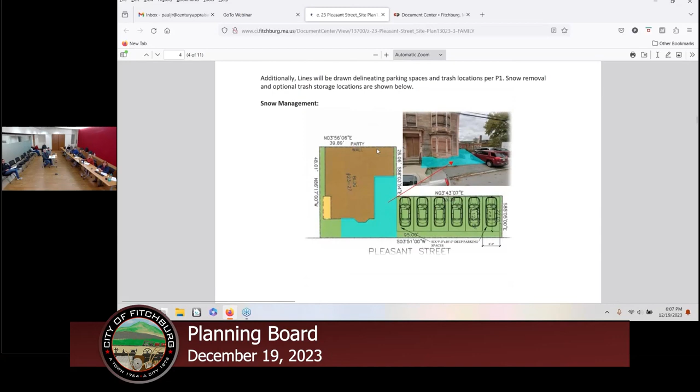Yeah, so if you start at the top, just scroll up. So basically, you can see that's the facade there, that's the front face of it. It hasn't been in use in a long time. This building, the back of it is attached to what appears to be, well, it's now an apartment building. I think it must have, back in the day, been some sort of industrial building. I think the owner kind of lived in the front part, and then it was attached to that multifamily. This is the picture that Peter sent me, the rear of the property.

Yeah, so basically the intent is to completely restore the exterior. I saw the comment from the planning board regarding the historical colors, which we're completely fine with. We're going to maintain the existing historical trim, put in new windows. Obviously, we're going to be getting a HERS rating. We plan to put in a full sprinkler system so that it's fully up to date.

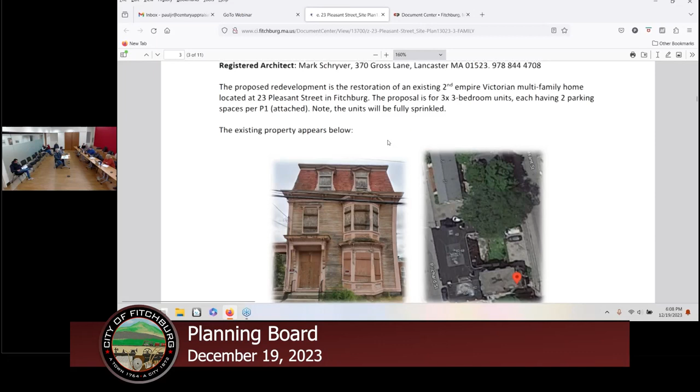And we'll try to really highlight the historical elements of the property. We'll do landscaping, as was suggested in the response to the application, and pretty much anything you guys would like to see, I'm happy to do, as far as the things outlined. There's not much area to plant, so it's kind of limited. We've got an 8x8 area where we can plant some shrubs, rather than a lawn, since that's not a good space for lawn.

The house is sitting on top of an existing parking structure, a giant concrete block, which I had my engineer come out and take a look at. He said that was acceptable. There was some work that needed to get done beneath the back stairs, not those stairs, but another stair on the side of the building that has a fieldstone foundation that needs some work, but we're planning to address that.

If you want to switch back over to the application and scroll down, I'll just talk through what I discussed. That was my initial idea. I like that kind of modern farmhouse look, but if the planning board would like to see something else, I thought it was historically like a modern twist on a historical look.

Except for the colors, yeah, we'll fix it. Colors are just, because you mentioned that the windows may not be black, so then they're white, so it's all white. Yeah, so that's fine. I've done some projects in Sudbury recently, and I like to see the black trim in the windows, but they like white. So it depends, it is what it is. I'm not really hung up on the color per se.

Going down, that's the only real area for plantings right there, so we'll do what we can. A mulched area with some low growth, hydrangeas, stuff like that.

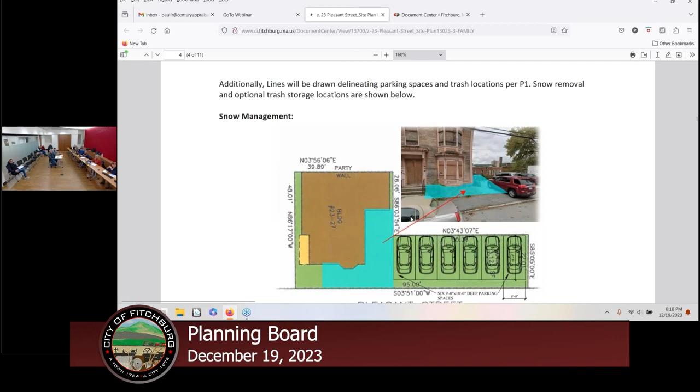In the photo there, you can see the actual parking. So it's currently utilized as parking space, and that was our intent, just basically to stripe it, designate it, number it per unit.

So you understand you're driving over the curb right now? Yeah, so you need to pull the curb cut and pull that off. I've submitted that to the DPW, and I indicated that typically it's 36 feet, so we were going to apply for a waiver for 54 feet. I think it should be 54 feet because there are 6 parking spots at 9 feet each. So that's where I got 54 feet, should be plus or minus a foot.

And then trash storage, you can see on the left there's a little deck area where we could put a few trash cans, or on the right there's also space there for trash management.

We can talk about that, because I see that by the plans you're no longer going to utilize the small porch at all for any type of entranceway? There isn't any entranceway there right now, it's just kind of hanging out the side.

So I could put up a little 42-inch railing there, there's enough room. It just doesn't look like it's got enough room. Do you know how big the totes are? They're not going to be able to pull one tote around another tote to pull stuff out over there. And you're going to need 6, 3 rubbish plus 3 recycling. I think there's enough distance between the parking and the other side, so if you have enough on the other side.

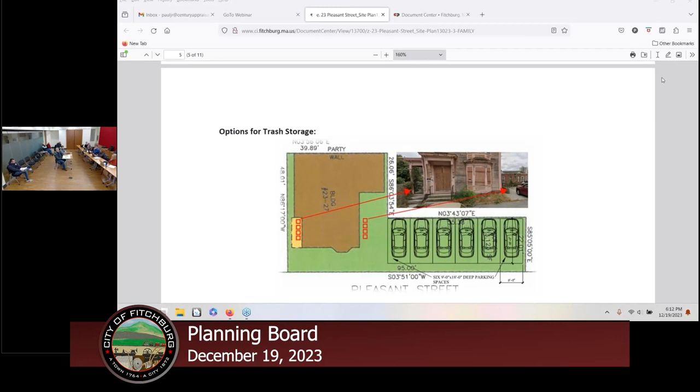Okay, so if you keep scrolling down from here, these are the waivers that I've spoken to Chantel about. So that's the existing curb cut, we're anticipating it to be 54 feet, and I believe the current code says 36 feet is the maximum.

So the existing parking structure goes up, all one parcel previously. It goes right up to the lot line, so I believe there's another waiver I would need there. Basically the parking structure on both sides is pretty much zero lot line, but it's been existing for, I don't know how long. It's gigantic concrete blocks, so I'm not really sure what else I could do as far as that's concerned.

You're in the downtown business district, so there's no lot size requirement per se, and there's no setbacks, it's only 20 to the front.

This is why we're able to also reinstate the use of a 3-family on our board versus having to go to the ZBA, because it's actually conforming. It's in a downtown business district and there's no lot line, there's no setbacks. So the building's actually conforming to the zone.

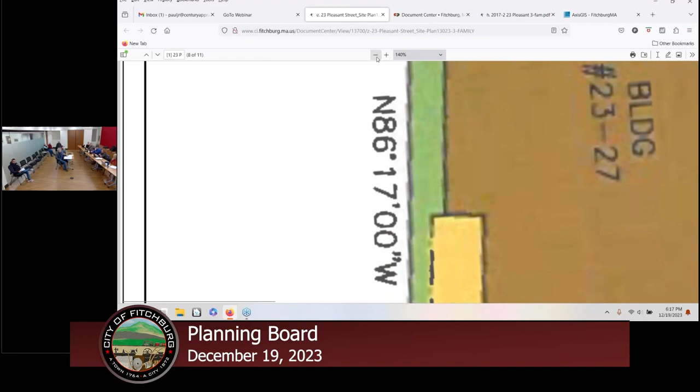No, I get it, and then the third floor is, like I said, its own unit. If you need to replace the railing, of course, I know it's not being used as an entryway or anything, but you need to have a railing. Yes, for sure, yep. And I noticed on the plans, I think that doorway actually goes into the kitchen-ish area for that unit, so it could be an option still. Yeah, it could be like a-

So Mark, you want to take that? Yeah, so on the right side, we've got the basement shown. So we have some common area in the front, right there, yes. And then we have the stair coming down, which is the center stair that goes top to bottom on the sheet.

That's the stair that circulates up to the first floor on the left side on the left plan. On the right side of the first floor, again, has the stair going up to the second floor. So that kind of captures the basement that goes with the first floor.

The first floor right side unit, you have to look at the following sheet to see the bedrooms for that floor. So now on the right side, we have the 3 bedrooms that go with the first floor unit number 2. And on the left side, we have the 3-bedroom unit on the third floor. Kind of like townhouse style.

Exactly. So we found that, and I did the project at 80 South Street. That's almost complete, and we kind of did the same thing there where we could. We made townhouse units out of it, and it accomplishes a lot of things.

One, it's much easier to fire rate, as well as the STC, sound transmission class. It's much easier to not have people walking above you. So we tried to limit that as much as we could here.

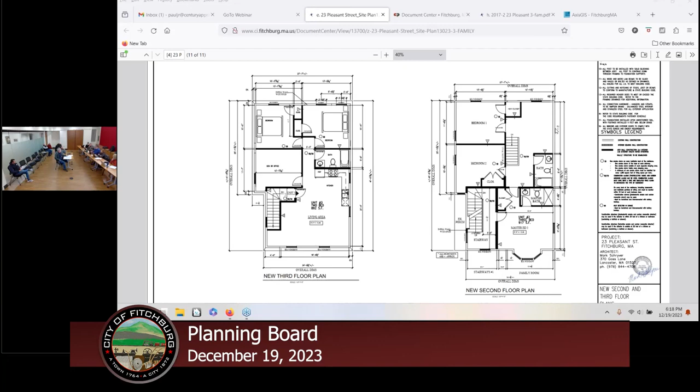That attic's unfinished up here? No, that's actually the third floor. Oh okay, yeah, it looks like a massive building from here. Well, the reason why I said that - yeah okay, I'll review the full plans again, but okay.

Say you're going to retain the historical molding portions and trim work, and try to choose a couple of historical colors - your main color and an accent color.

What are you going to do for heating, cooling? Just because we don't want to see stuff hanging out the windows. You're going to have that mounted somewhere, or some type of - yeah, so we're planning to do heat pumps. That will be ducted heat pumps that will serve the entire space, and we'll probably put the equipment on the roof if possible.

Was there a space on the other - I forgot. It'll either be mounted on racks right on the side, which we could cover with some sort of vinyl if you didn't want to see that from the street, but lower to the ground, not hanging off this. Yeah, there's actually, if you're on the front, it kind of goes down behind where the... see that protrusion to the right there?

Correct, so I think that's where Aaron was saying with the rooftop. So it doesn't mean on top of the third floor always. Yeah, so we have the first floor structure that we're going to reutilize there, but there's nothing really on it. Some of the previous plan sets we inherited had all kinds of things going on there, which I think uglified the building, if you will. So we're trying to keep it fairly simple.

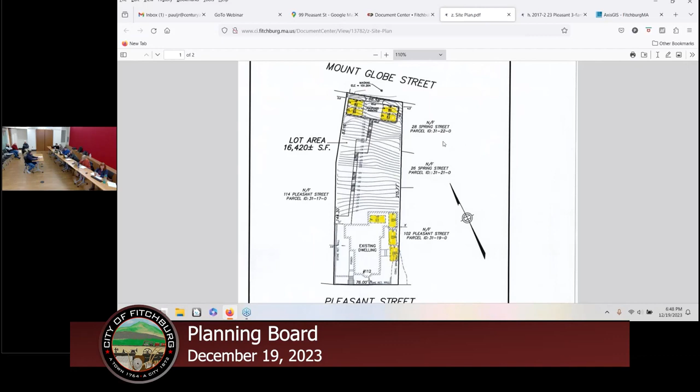Not sure if you saw some of my comments, I sent some to the office a week ago, but I just want to state that parking generally, you can't use garage spaces unless they fit, I think it's 11 by 21, counting as parking spaces. That's in the building ordinance.

I can't even understand how you go perpendicular to that in there. Oh, you mean this one right here? Yeah, I wondered that as well. Figure how you do that. That one doesn't seem possible in real life. Maybe the first one, especially looking at this, to go in there and then do a left-hand turn.

You can actually make that maneuver in the garage? Oh yeah, yeah, there's enough space to do it. But actually, I don't need that space. We don't have to count that one.

All right, let's start with how many units, how many bedrooms in each unit? First floor has 2 units, 1 bedroom unit on the left, 2 bedrooms on the right side. So the first 2 units are 1 bedroom and 2 bedrooms. The third unit on the second floor is 3 bedrooms.

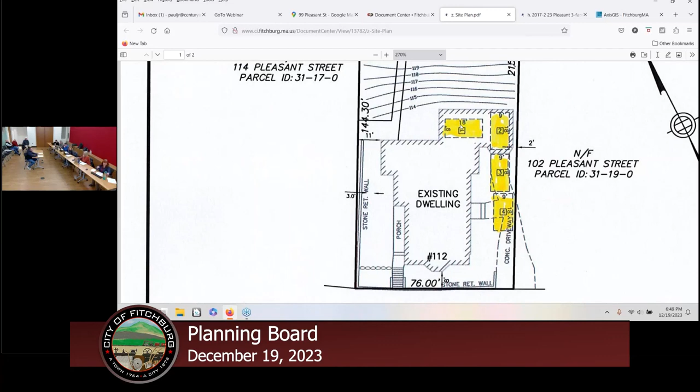So total, 5 spaces... 3 total units, 5 bedrooms, 6 bedrooms, wait a minute. It's not multifamily, so it's just 2 per unit. Well, that's 6 bedrooms. No, but it's 2 per unit anyway. Oh right, 2 times 3. Yep, because it's not by bedroom, it's by family count. Yeah, so you need 6 for 3 units.

So I think to your point, Paul, the garage space, it's listed, I think they just took the parking space and put it in here, 18 by 9. But even if you took out these 2, and we're okay with 2 tandem in the driveway, which you can see right here, 2 tandem in the driveway, these spots, and we have to talk about these spots, but there's 4 up here off street that don't back into the street, which is nice.

Yeah, I do want to see Mount Globe. Is that stairwell? What's the condition of the stairwell? There is none, oh you're building that. I'm building a retaining wall. Whoa, yeah, that's a big project.

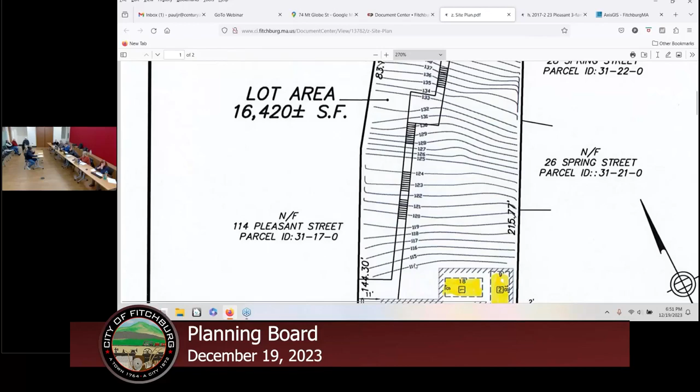All right, what am I looking at? Parking wall, retaining wall, this one? Yeah.

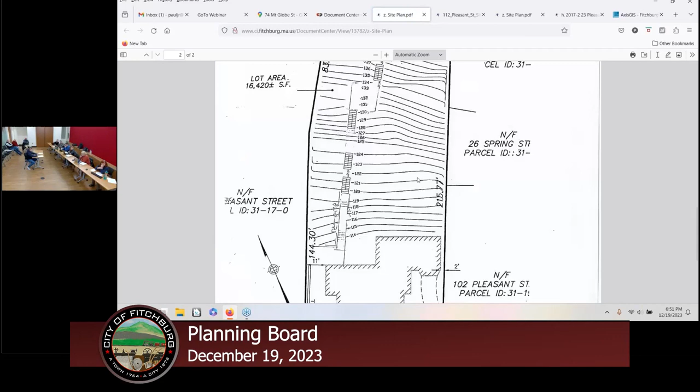If you keep going, this one right here? There's another one. So it was stamped by an engineer. That's all I have, unless it's in the narrative. No, it's not in the narrative. That's all I have. I have site plan, unless it's underneath the site plan. Oh, nope. Yeah, I think that's the one. I think that shows there's elevations there, the elevations in there.

So I guess the question is, how is the staircase to be constructed and of what material? We have 2 options. Either I will do it with the blocks, same material, or I can use PT. But every drop, I'm gonna have to have a little stand, drop it again. Landing, yeah. Looks like they have something there on the sides before. That's what I'm trying to do, the same thing they had over there.

How long's the building been vacant? It is vacant, right? Yeah, when I bought it, I thought it was vacant for over 2 years. But when I talked to the building commissioner, he told me the definition of being vacant is like abandoned. He said if someone stops paying the bank, we consider it abandoned. When I was looking at the house, I talked to the neighbor and he said a couple of months ago people was living in here. I didn't know they can revoke an occupancy. Yeah, many years ago it used to be water shut off, but I think our prior building inspector said you can challenge me, you can get all the documents, or go for the permits, or you can just do what you have to do, and that's it.

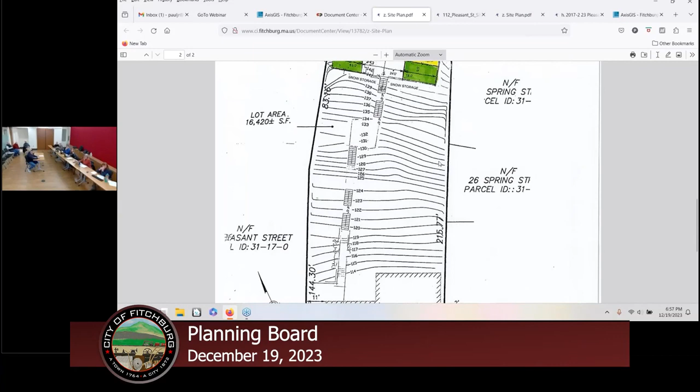But go back, sorry, I was just pulling up the aerial. Which one do you want? That plan, but show the house with the driveway. Right, the one with the cars?

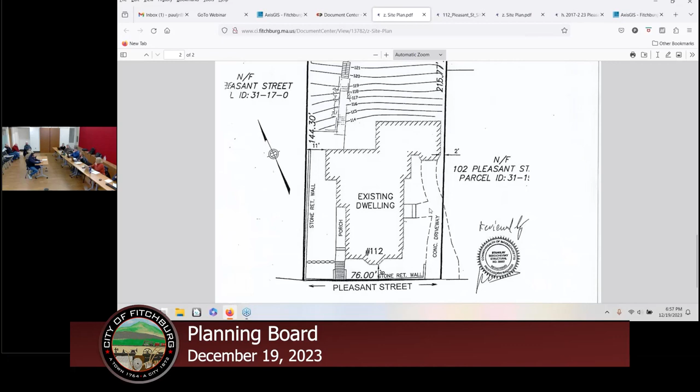I looked up in the registry of deeds, and each property, yours and the one running to the right, both have easements to use the driveway. I wanted to make sure everybody's got easements, otherwise you'd need to get one. So we checked on that.

That looks okay. A consideration you might also want to make, since that's extensive work you're proposing up there, is whether or not you can make the driveway a little bit wider to the left so that you can actually fit another car.

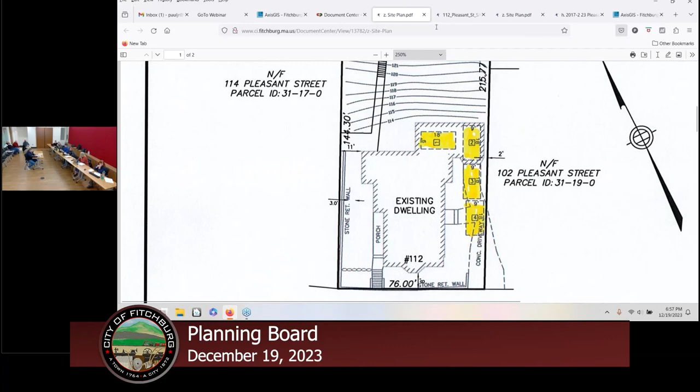I couldn't, but it just came into my mind to do that, and I fell in love with the house. I like the details and everything. It's a good looking house. My wife is like, just sell it. I said no, I like it.

I have kind of a wild thought for you, but when I looked at your plan, it immediately came to my mind. I know you're going to spend a boatload of money building a retaining wall out of blocks, and it's going to be challenging to do that. Did you ever consider...

Why not go for 8 parking spaces rather than 4? If you're going to do 4, you're going to have this amount of money spent. If you're going to do 8, well, you might have that same amount spent. Honestly, I was planning on doing 6 up there, but I didn't know the requirements. He said you can't back into the street, that's the reason why we did it that way. It would have to be deeper.

What I'm thinking is if you had additional parking spaces up there, that's really a neighborhood where people are looking for parking in the winter. You could basically rent a parking space or two to someone. If you go back in Mount Globe and see the neighbor, how he has his parking right next to it.

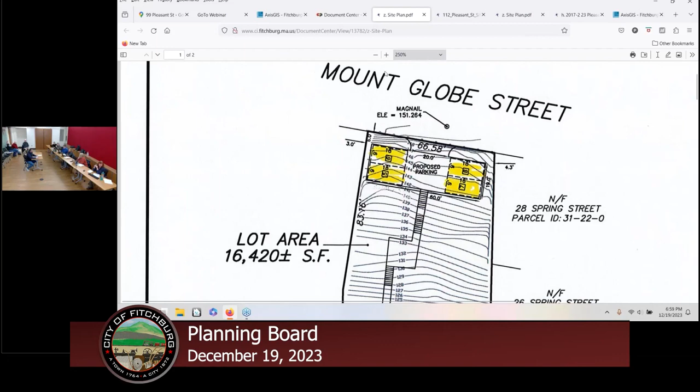What did you want me to show you? Oh, that picture? No, not the picture. Let's see, hold on, I got about a million things open. Look at, just go around and go up and behind the house again, you can see the neighbor, how the neighbor has his parking. I can turn the 3D off here, let's see what I can do with this.

I was just saying it's a big expense for 4 spaces. So how does it do that? About 65,000, is that what you're talking about? They park on Mount Globe for that?

So here's the... no, that goes with this property. That's the property record, this is the property record for that one. So they might use it, but they don't own that. Oh, they don't own it? Doesn't look like it, let's see.

And I think what they say about 50%, like the renovation, I think he talks about sprinkling the house.

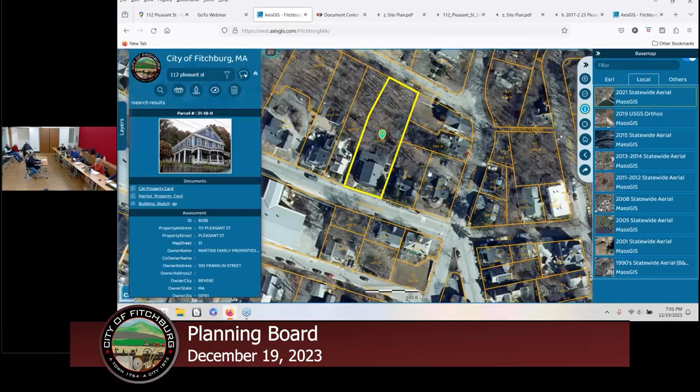So how does the neighbor park the car? You're talking about the abutting neighbor you share the driveway with? No, it's right behind their house. So do they come off of Spring Street? Is that what you're talking about?

Yeah, they come off and in the... hold on, let me do this, let me put up the driveway. If you do a street view, you'll be able to see it. So this is Spring Street. Keep going. Oh, so you want to go up Mount Globe? Yeah, I'll go.

Like I said, he might park there, but it doesn't look like he owns those spaces - these ones right here. So that's where they park? Yeah, according to the assessor record, that's a different parcel - that's this parcel right here. I see, so they might use it.

Out of curiosity, who said you couldn't back out into the street? While I'd prefer you not back out to the street, our bylaw expressly exempts single, 2-family, and 3-family homes, allowing them to back out into the street. What's on the driveway? 36 feet. Okay, so you could do 3.

To be honest, I'd rather just do 6 parking spots up there. Six is too long. No, but it's the way it's in there now. Can I do like tandem, or no? It has to - you have to stay under 36 feet wide. So it's the curb cut that limits it. Oh, I see.

So if they're 9 feet wide, you get 4 spaces. Okay, 5 spaces would be 40 feet.

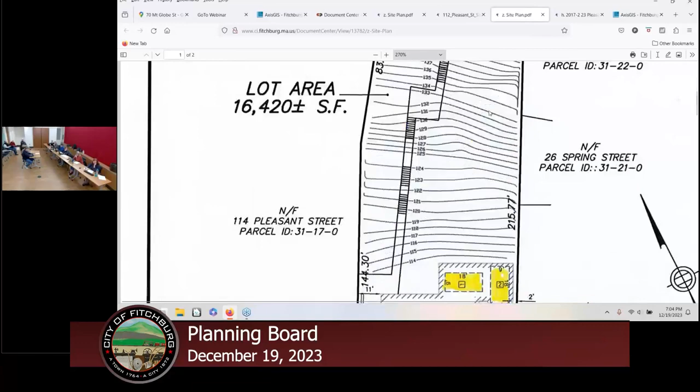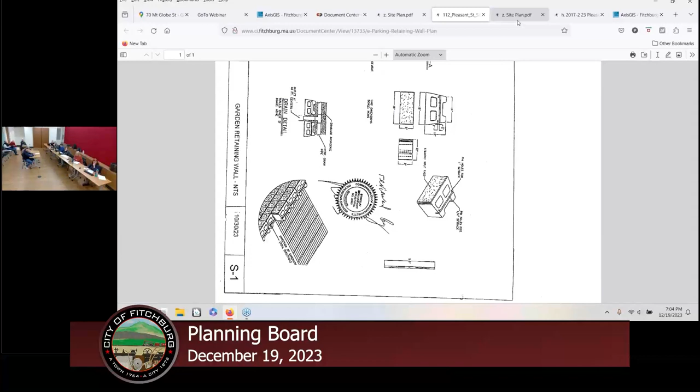What's that? Is it showing? Yeah, I don't know where. No, it's not - the curb cut, I think, shows only 20 feet there, but I don't know how close it is. Yeah, it's way down. Yeah, we did deal with it. It's there. No, it doesn't show it there. Well, unless it's down here, I don't know. Yeah, so right now it's still showing the chain link fence going across the opening, so - did that.

And the wall, I know it's 9 by 18. You'd have to decide what the fencing or guardrail is gonna be shown on, decide what the cliff is, on top of the wall.

Is that still gonna be a pitch? No, I don't think so. It's gonna be pitched this way, very mild.

If you're building a retaining wall up, you obviously want it to drain away from the street, but you don't want it to sheet flow into your house or the neighbor's house either, so we need a depiction of what you're putting on top of the wall.

It's like how tall, the retaining wall is gonna extend itself and extend over the top. The code's gonna come into play there too, it's gonna need a fence or guardrail.

Going back to what we were talking about earlier, ideally that parking lot's mostly flat, with a very mild pitch so it grades off. If it's mostly flat, you don't have to worry about someone sliding down it. So you'd have a wooden guardrail built in, and then like a 4-foot vinyl coated chain link fence, like we talked about, to keep someone from falling over.

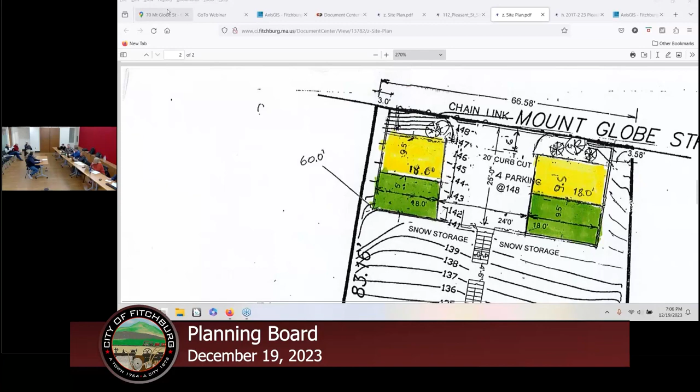Taking out the material has a cost, and bringing in new material has a cost, but I think they offset each other. You gotta build a wall either way.

I actually have the option to keep the garage, just remove behind the garage, so it'll be like a carport, the car can go in and park. But it's still, I gotta put a retaining wall there no matter what. You gotta build a retaining wall.

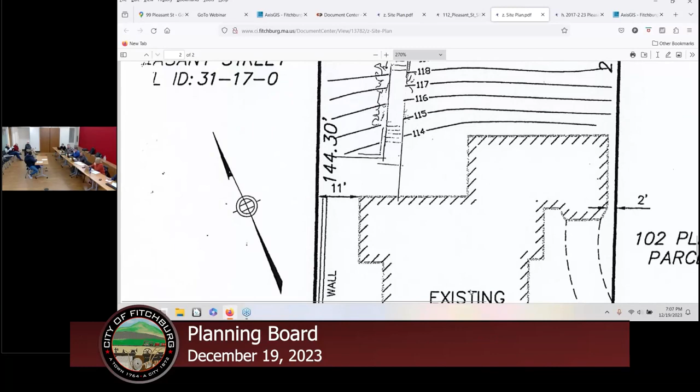I already looked at every single one, I will say what Mr. Donnelly was saying was, it's safer for you, it's more probable that your tenants are gonna do it. Even if you have to dig into that hill and build a retaining wall, at least you're creating something that's usable to you, much more usable to your site.

I think if you have to do parking, and that is feasible, I didn't even think of that. If that is feasible, then you might be better off. Your cost might be more or less the same or similar, but you have a much better product in the end, much better for your tenants, much more saleable when you decide to sell it.

I appreciate that you're gonna put them up there, and if you find out that it's not financially feasible to do behind your building and you wanna do up there, it's better than nothing, meaning it's better than what's there now and what your neighbors have.

But I do question, January, February, March, how many people are gonna use that? In the summer I think it's probably not a problem, but it's still a lot of stairs.

That's why I think, with the expense of doing that, I do like the alternative to think about, if you do have to put the retaining wall, create just a little bit more space. Similarly, we could get one more space in the front of the driveway there, if we can't get it in the back, if you have to shift it, just to create a little bit more.

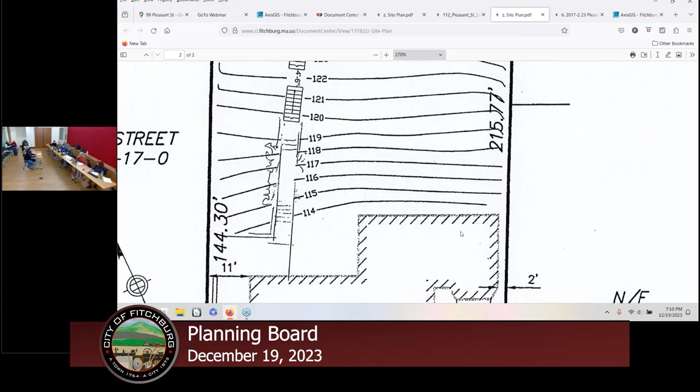I'll be honest and toss this out there. If you can get it all on at one level, great. But minimally, if you can get 1 per each unit, and then do 1 per each unit at the top as a reserve, and then the other 3, 1 per each unit on Mount Globe Street, so people can get there. It's not like people can't get a ride back, but they'd have to go on Mount Globe Street, though at least each one has one. That might be something doable.

I'm not sure how the ZBA would look at that per se, from a permit perspective. Without speaking to what they're gonna do, but speaking to what we would do if we controlled the use, part of the conversation would be, if you're gonna do this parking so far away, and if they question the practicality of that, which I do to a certain degree - if we were controlling the use like the ZBA is, and we question the practicality, they might say you can get 2 or 3 spaces on the Pleasant Street side, so that's gonna dictate how many units you can get. That's why I think it's important, if you follow something like what Mr. Donnelly was saying, where if you can have it directly behind the building, there's no question - then it becomes a much easier conversation because you can actually show the parking.

I'm just warning you this might come up because we're not dealing with the use. Right now, the number of units doesn't come into play for us, it's just how many parking spaces can we feasibly get. If we condition it, like saying it's assigned to separate units, that could be overridden by the other board. So that's why it's like, if you're just showing you've got 6 parking spaces and they're all saying this is easy, like that - but other than that, different alternatives may have different outcomes because of the practicality of it.

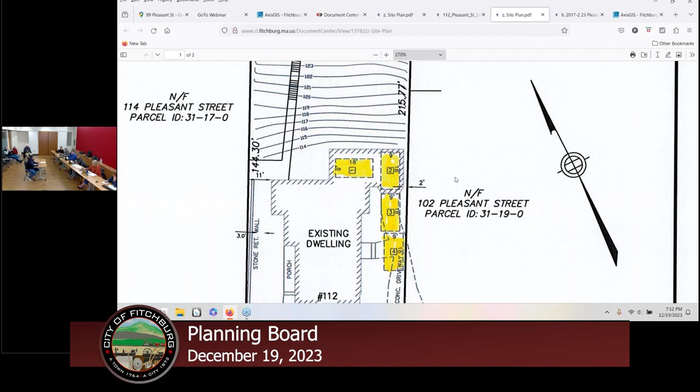This is why I brought it up earlier about doing the ZBA first, because we could theoretically say you can get 2 or 3 spaces on Pleasant Street, and at least 4 spaces on the new lot on Mount Globe, so you have parking for 5 or 6 spaces or whatever we end up determining. I think it's destined to have further conversation with them and potentially come back to us anyway. So that's why I still feel it's better for everyone - the applicant, the ZBA, us - to let that part play out first, have them say you need parking for X amount of cars, and we determine where that parking is. Although I'd venture a guess the ZBA is gonna want to determine that as well.

It's interesting because if it was multifamily, it would only be 5 potentially, or depending on the number of bedrooms - they say it's 1, 1, and 2.

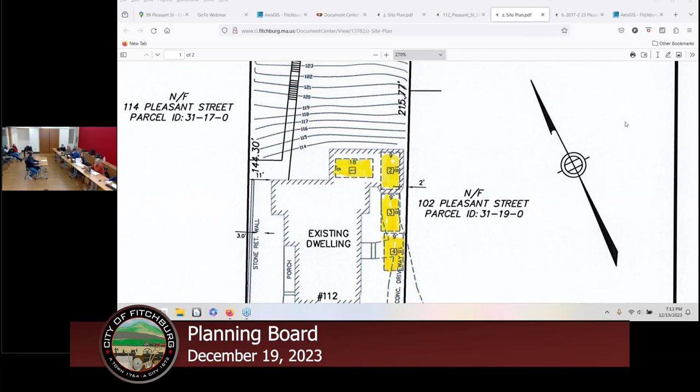So there's some things in public comments. Anybody in the audience? We have some - I don't have any hands, but we also received some DPW comments. Chantel can forward them to you, we got them on Friday. They were: applicant to please reach out to engineering for curb cut permit.

Can the applicant explain how they are going to handle stormwater runoff? It appears the pavement will be pitched towards the existing building with a retaining wall. How does the applicant propose to keep the retaining wall in place and mitigate erosion from the stormwater runoff? Can the applicant provide details of the retaining wall for the proposed pavement area? Some of that, I guess, whether or not there's drainage involved also. Depending on the size and height requirements of the retaining wall, does the applicant propose to contact the building department? So the question would be, with the retaining wall, have you spoken with the building department about what you're proposing?

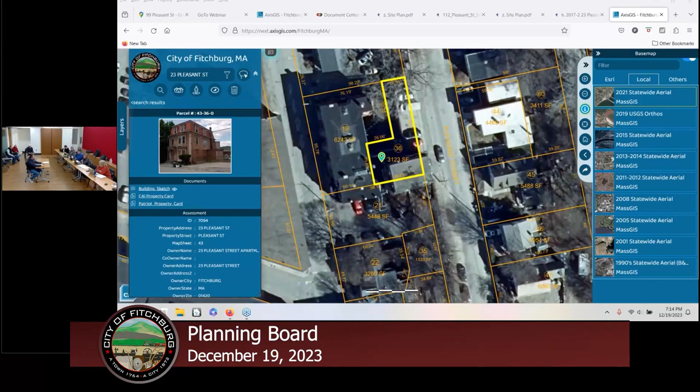No, to be honest, I spoke with engineering. I went there and explained what I want to do, and he explained to me what I need to do. I asked him, could you show me on the GIS a house like this? He spent 45 minutes, couldn't find anything. He said you can't touch the city hot top, it has to be concrete for the first 5 feet or something, I don't remember. But building is very involved in the retaining wall piece.

So we need to touch base about whether or not that plan you had done passes muster. Does it include the stormwater pieces in it? Is there anything else that needs to be done in regards to that?

Think about the things we've talked about today, a couple of things. You could probably do within the 36 feet maximum width for a driveway. Because it's a 3-family, you can actually back out, but you can only probably fit up to 4 spaces.

And up on Mount Globe Street, on the bottom area, it's whether or not you can eliminate the parking at all in Mount Globe. So you can see if you can do something with the garages or the retaining wall there, just put the 6 spaces you were looking for. I might take a second look and see it, or maybe it's 5 practical spaces.

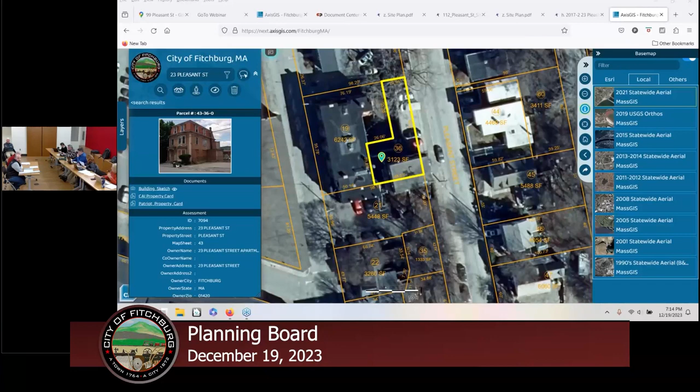All right, our next hearing this evening is a special permit and site plan review. Nakoro Inc., Mr. Lamoureux submitted plans for a proposed miniature golf facility, a commercial outdoor recreation located at 299 Lunenburg Street in the zoning district C, a commercial zoning district. What would you guys like up?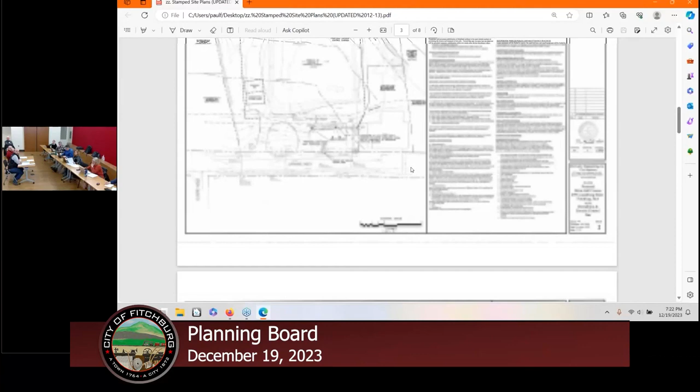This was previously approved, I think, as a self-storage facility. Yes, I was gonna get there. We had to switch. So Paul, if you don't mind. Yeah, whatever you want, the layout materials plan, so sheet 2. Oh, so that one? Yeah, it's in the plan set, so go down one more. Yep, that one. So just for the record, Justin Leclerc, McCarty Engineering, here tonight with the owner, Rob Lamoureux, for the proposed outdoor recreation facility that you see in front of you.

So like Paula said, we were in front of the planning board previously for a self-storage facility. Due to unforeseen circumstances, a change in the market, you would say, we looked at different options for different business to come into the city. Mr. Lamoureux, through his due diligence, determined that an outdoor recreational facility with an 18-hole mini golf course based in this area would bring in new business to the city.

So we worked alongside Mr. Lamoureux as well as Harris Mini Golf, who designed the course itself, to come up with the site plan in front of you tonight. With this, we're maintaining the existing curb cuts that are there right now on Lunenburg Street. You can see them striped at the front. The entrance located on the right-hand side will be two-way in and out. The drive aisle on the left-hand side of the plan will be exit only, a right-hand turn only, noted with directional arrows, sign, as well as a stop bar.

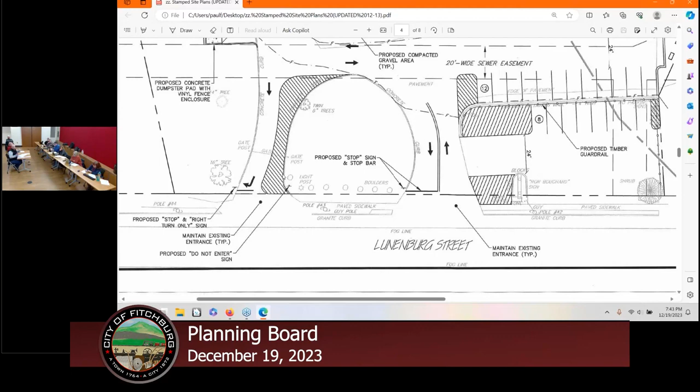I think making that emergency access only again takes away the major traffic. Would that be the easterly-most or northerly-most point? Let me check - the arrow's going down in this case, so it's easterly-most.

Something small - the dumpster location, typically we don't like to see them pushed that far up. Can you just move it back toward the parking spaces? Not the hammerhead turn, but we actually did have it toward the back originally.

The only reason we pushed it forward was a couple of reasons. One, thinking about the nature of this business, it's going to be young kids working there - I was thinking about my daughter working there at night. It's dark out, and the last thing she'd want to do is bring the trash all the way to the back corner of the property, which would be at least 225 feet. It's tucked behind a tree with a vinyl enclosure around it, but it's still 125 feet - a pretty large property to get from the building to the trash. I was just looking for an alternative, thinking if it were my daughter, the last thing she'd want to do at night is walk to the back side of the property when it's dark out.

So it's a mix of... are you driving over it? No, not the walking area, it's more of a walking area. So you have the walking area to get up to the building, but the walkway that you see specifically that runs from there to there is just a bituminous paved ADA path.

Because for ADA access, you need to have a certain minimum of compacted material, and it's got to be relatively flat. So where we have this whole recreational area from inside the fence down to the back of curb as compacted gravel for people to come and go, that material isn't ideal for ADA accessibility. So we at least need to provide a hard bituminous paved walkway.

That's all gonna be bermed though. Yeah, so the parking area will be bermed and there'll be compacted gravel behind it. And then the only spot that you're having a bituminous walkway is from the ADA spaces, the straight shot up to the building. Should there be some type of walkway going from that front parking area over to that, though? Because now you're gonna have people walk right through the travel lane, kind of around it, or just step over the curb onto it.

You step over the curb to that compacted gravel area, and that's why it was meant to be compacted gravel. That's why we didn't want to put grass, because obviously people walking over it's gonna get muddy. It's gonna get pretty messy and not look all that good.

Is that like the waiting area where people wait for events and whatnot? I have a pretty good visual of it. I think it's called the business plan under the meeting materials. What I was gonna say was, this is...

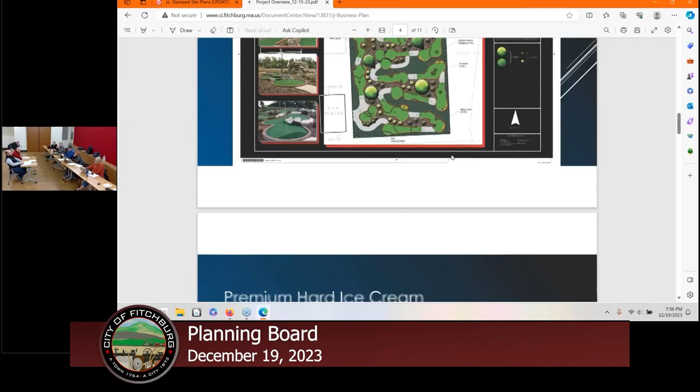Is it gonna be that level? So you're not gonna... yeah, you're not stepping up or down. No, the compacted gravel will come to the curb. Okay, yeah, I thought it was right. The curb, then you get the gravel, so it's just... no, it's flush, you don't tend to walk over it, you would come flush.

Towards the bottom has the point of sale building, to give a little bit better visual. So what you see in the top picture, that's where the ice cream sales are gonna be. So it's 3 windows, where the logo is, where the sign is facing Lunenburg Street. So where you saw the walkway going from the parking spots, that's where the line's gonna be.

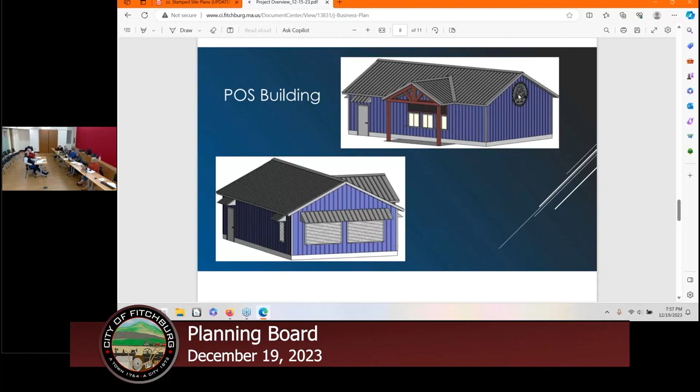So we made it just over 70 feet long, an appropriate amount of space so that people aren't standing in the road. Because that's something you commonly see at ice cream shops - it wasn't really thought out too well. It gets busy, and all of a sudden the lines start getting into the parking lot. So we pushed it away for that exact reason.

For one, to make it so that it's not a large slope going up there, so it's a little bit easier to actually get to where the windows are. And then it allows for a longer line. So that's the same thing that's in front of the parking, in front of the pavilion with the fences.

So where that parking is, that's the same material? See the handicap spaces to the left? Yep, so that is a similar material? Yes, yep, yes, this is the same as this. Okay, yeah.

Again, the walkway there is specifically to provide ADA access that's adequate. And just to be clear, what we're proposing to put there for gravel is ADA compliant. It's just the maintenance to keep it compliant is difficult. So that's why we provided a walkway, just to make sure.

5 feet, yep, your typical ADA walkway. So it is going to be compacted - our objective is to actually put it down and maintain it. But just for peace of mind, because it's gravel, it's going to eventually move, we're going to have that walkway there too as well.

The thought is, I know Fitchburg does this maybe a few times per year - you mentioned the food truck in the back part of the property. We'd like to have a couple food truck festivals throughout the year where, if it ran parallel with Lunenburg Street, we could put a couple food trucks there as well. So we wanted to mark that on the plan so it's already looked at, saying here's what we're doing with that space - maybe have a hash mark or somehow reserve on the plan that this is for that potential future use, so that it's already approved on your site plan.

Justin, there's a little lip here, right? Yes. My biggest concern would be - I don't necessarily have any problem with just adding a notation that says future food truck area or whatever - I just would never want a situation where someone could go over that curb and enter Lunenburg Street anywhere other than the dedicated entrance and exit. So should there be like a similar rail or something? I think he said there's a lip there, that's why I was asking.

Yeah, there is - landscaping, like that. And that's also the dedicated sidewalk on Lunenburg Street too.

Yeah, so somebody would have to drive over the sidewalk to get there. There's a curb there, there's a lip on the sidewalk, and then there's the actual curb. So I don't know whether or not it should be defined a little bit, because that's the look you look at. Can you go back to the site plan for a second?

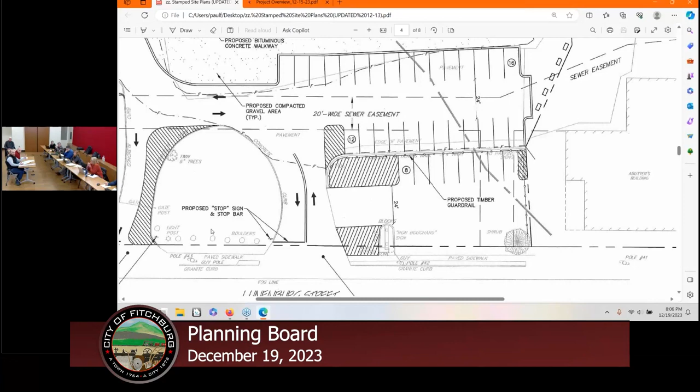That's fair. And regarding landscaping too, in the middle where that island is, on the other side of the drive aisle, as part of the original self-storage plan we're still going to show landscaping beds in that area. But we'd like to leave the boulders. I know as part of the original plan it was requested to take the boulders out and put landscape beds in place, but after Rob owned the property and saw what's been going on, he'd feel better leaving those boulders in place to deter people from entering and driving onto the site. But done right, you could landscape around those boulders with plantings and add them as an additional feature.

Can I speak real quick about it? Make it a field stone wall, like that.

Yeah, I've owned the property for a year, it's a nice property, no doubt I'm very fortunate to secure it. One thing that's clear is any vacant property, people love to throw trash and debris. So I spent the whole summer, twice a week, going there and cleaning everything just to keep it presentable. It looks pretty presentable for having nothing there. I took care of the grass, and we'd landscape around that.

So where I was going with it is it's a seasonal business, so there's going to be a period of the year where we're not operating. Anytime you have a vacant property where you're not operating, there's an opportunity for somebody to want to dump their trash or debris. This deters someone from doing that.

Like the other side where the upper parking is, there's that lip, so to go over it you have to go over the sidewalk. Right here is basically level with Lunenburg Street, so it's a very easy one to go around. I put those Jersey barriers because people wanted to dump their trash here and it became a landfill. If we took those out, it would be pretty easy for somebody to just go around.

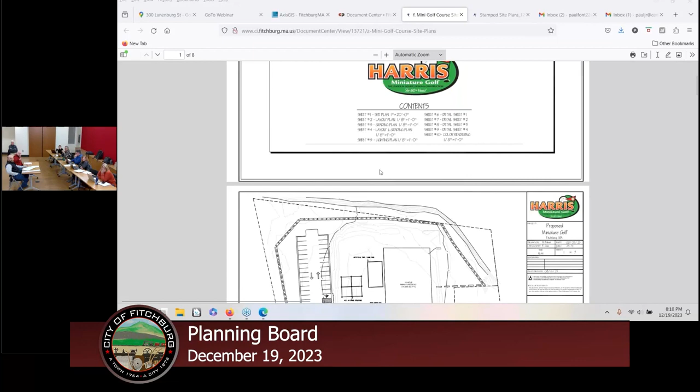Well, this is one of them, so you can kind of see the site. But if you pull up that other one I put together - is this plan? Yep, this is plan. So if you give me 2 minutes to run through, I can tell you what our attractions and offerings are. Okay, that really wasn't even going to be my question. He's very excited about this, as you can tell.

I've been to a lot of mini golf courses in my day, not recently. And when I go to some of these, in my mind I can say this course is okay, go to another one and think wow, I love this course, it's great. So on a scale of where these mini golf courses fit, is this high end? Have you been to Kimball's?

Yes. Have you been to Chuckster's? No. So it's the same people that built Kimball's. We went with the highest end construction and engineering company to design it. We custom designed it, so there's no other course around that looks like this. One of the main focuses, which is why it took so long, is we wanted to be the only course that's 100% ADA. Because you go to Kimball's, you go to Mulligan's, any of those - they're not 100% ADA, they do the bare minimum to be compliant, which is 50%. It never made sense to me that somebody in a wheelchair can pay to use the whole course but can only use half of it. So this was custom designed to be 100% ADA - try to find one around here like that, no one does it because of cost. So when I say budget, we tried to be as thoughtful as possible.

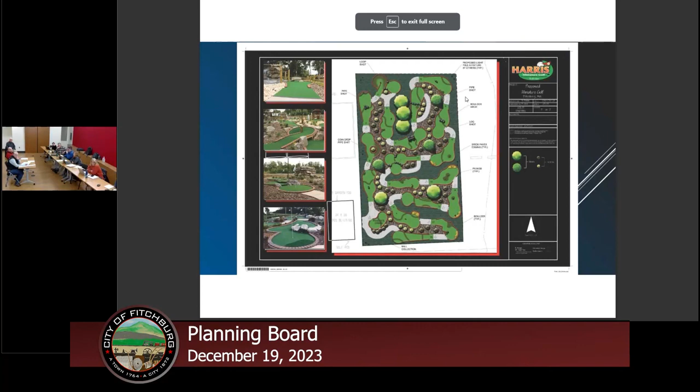This is the actual design. We're adding 54 trees and shrubs to the property because, to me, that's what brings it to life. I didn't want to have big caves, we weren't going to have windmills - it's on a busy road, and we wanted to have a more natural looking landscape.

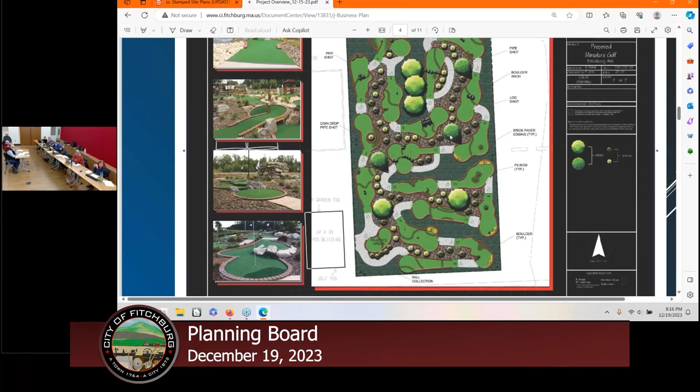So we're adding a lot of plantings, a lot of trees - this is where the money's being spent. 100% of it is contoured, and this is where it was difficult, because we wanted to make it contoured but still keep it ADA compliant, which is extremely difficult to do. So we had to have everything custom - every grade has to be done just right so the ball is accessible to somebody.

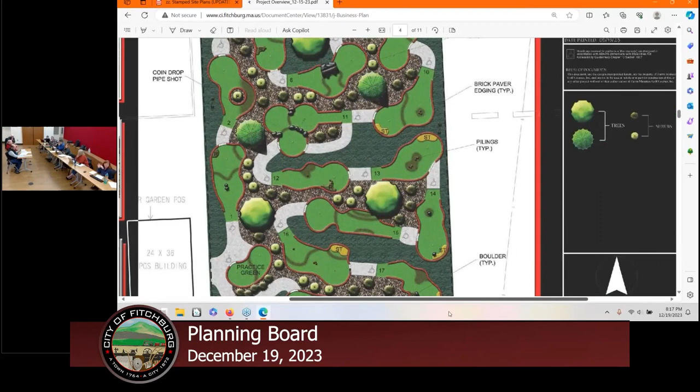A lot of courses, especially the lower end ones, have holes that are only 15 to 20 feet long. Ours go up to 45. Our design intent was to make a course that can be enjoyed by kids, that's not overly difficult, but can also be enjoyed by adults as well.

Because there's been other ones around, like Lancaster Golf had a mini golf course that no one used because it was so difficult. It had no barriers on the side, so you couldn't even finish the first hole. That was funny, but we thought about all of that.

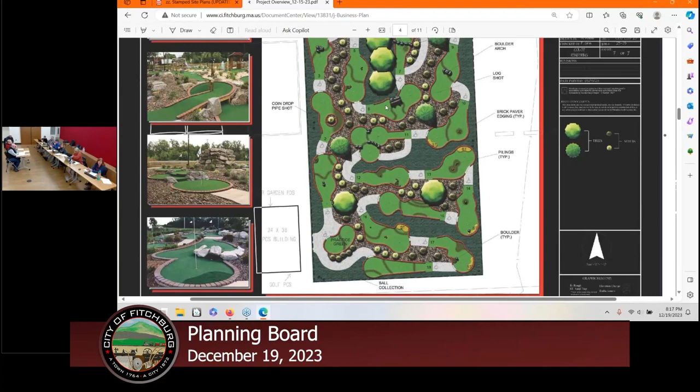We put the appropriate contours in there. This is as high end as you're gonna get, and it's 100% custom. Me and my family actually completely designed 5 of the holes, so it's 100% custom to fit this property. We put 7 months into designing it to make sure it's gonna be something people are gonna like.

So along the same line, you're going to be doing... we gonna talk about ice cream? I was gonna say, I know you want to talk about ice cream. I want the ice cream you're gonna serve.

Okay, so part of the 7 months, we had a lot of fun research there. Our goal, we're not gonna make the ice cream, as most places don't even know — they say it's homemade ice cream, but it's not.

We actually tested out different distributors throughout the United States, and we went with the one that's the highest rated ice cream you can get, wins all the awards. It's from a dairy farm in Wisconsin, the Chocolate Shoppe. They have the best ice cream. We got to enjoy so many flavors, which is good.

So we did our research. They actually have 150 locations, nowhere near around here in Massachusetts. We went to every single site, looked at every review, and every single review says it's the best ice cream around. And we tested it.

There's certain things in ice cream that make it better, like the butter fat content. This is actually considered super premium ice cream, where most of the high-end ones, like Rota Springs, are just premium. This one has a little bit more butter fat, which makes it even more premium.

We weren't gonna have that, but if you say we have to — so we're pretty confident that people who come here for this ice cream are gonna say it's the best ice cream without a doubt. We did our research with that as well.

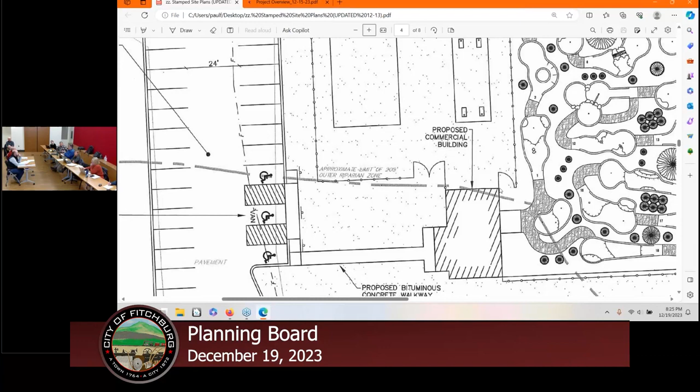Ideally you would go into the rec area, right where I'm showing you, the way the building's shown. I'm just saying, not as a permit condition, but be mindful when you install this bathroom that it's in the area where you can expand in the future.

I think Paul is right. I think it would be beneficial, especially if you're very successful, to someday in the future add indoor public restrooms. I can tell you, my daughter's in a wheelchair, and a lot of times you need the extra space.

As much as the accessible porta potties are fine, you need the extra space to handle that, and that would be a very good contribution to your patrons.

While we're on that topic, at EDTF the police chief did have comments about the porta potty. I believe he was satisfied when he found out they were behind a fence, and they'll be locked. The issue was people getting to them when they're closed. Yeah, so they're gonna be locked.

So is that a 4-foot fence in front? Yes, 4-foot fence. Is that the black one? Black, yep. Fence on the front going around.

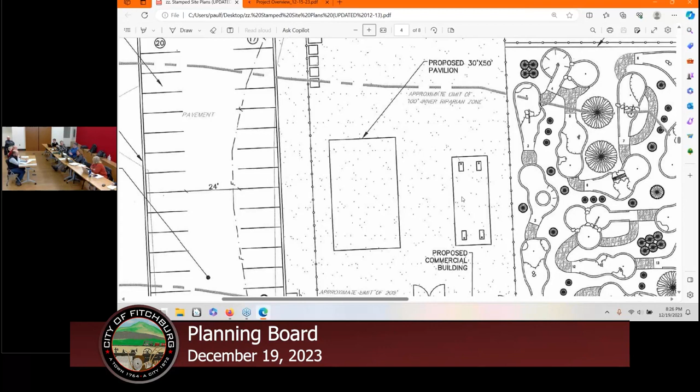Think about whether you have the one food truck in the back - I'm not sure how many food trucks. For regular operations, the idea is one food truck. When I talked about the upper spot, that's for certain Saturdays in the summer when we promote having food trucks on site as another attraction, but for regular operations, just one food truck.

I'm thinking of utility pieces - if there's anything like electrical that could be beneficial to set up a station. If you have an area kind of dedicated to food trucks, having that utility hookup would be helpful. So think about that, even laying empty conduit down while digging up the turf now, so you don't have to dig it up later.

Speaking of conduit, we are proposing conduit at the front of the building for EV ready spaces. I know that's a big thing with building code. So these spaces down here, the first two spaces ideally right there - we have a conduit that's gonna come in and split them.

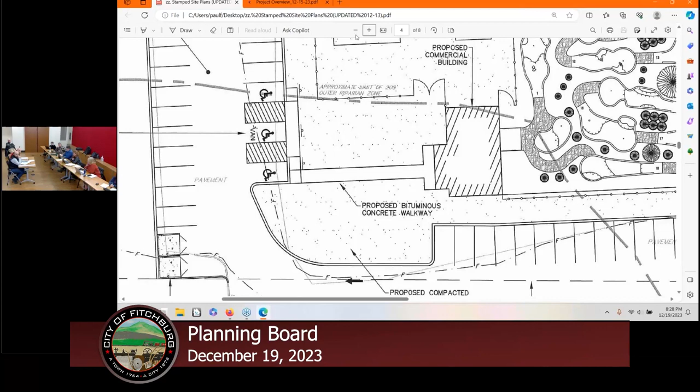My last bit on landscaping - on the self-storage plan, there was a row of landscaping between the end of the little hammerhead to the Thunderbird over there, whether or not you wanted to screen just past that, adding some screening on the whole back length to the other side. So, we're proposing the bin blocks and the Jersey barrier instead.

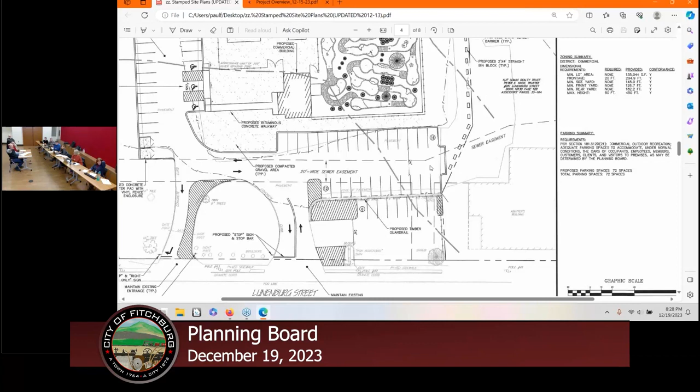Main reason being we're not removing the existing pavement there. As far as the self-storage, the pavement wraps all the way around and ties into the adjacent parcel, as part of the original plan for self-storage with as much impervious area as we were putting in. So it's still pavement beyond that - yes, pavement along the right, you can see how it all ties in. Oh okay, so as part of this project we're not removing that existing pavement. Oh, so we wouldn't be able to put landscaping there.

So the bin blocks and barriers separate people from entering the site with a vehicle. And the bin block looks like - I have a picture just in case you asked that. That's what I'm seeing on the site plan, those little rectangles? Yes. So they're smaller, not Jersey barriers, only 2 feet high, but it makes it so they're only off to that side, so they're really not in the visual. Yeah, and again, it's just to separate the two parcels.

Okay, makes sense. You want to see that? Okay. What else do we have?

Oh, you have the double gates going into the pavilion area, is that for larger access? So access, if there was ever somebody that got hurt, to have an ambulance have access to it. That's the whole idea of keeping access on the other side, because it's a pretty big property. We're adding a lot of landscaping on the mini golf, so we wanted to keep access to maintain it, but also if somebody got hurt, it's easy for an ambulance to get back there.

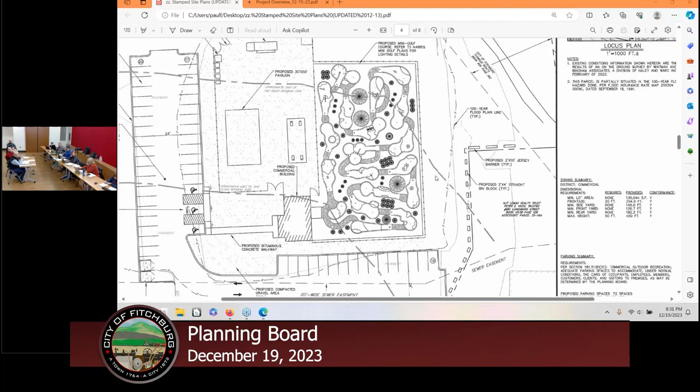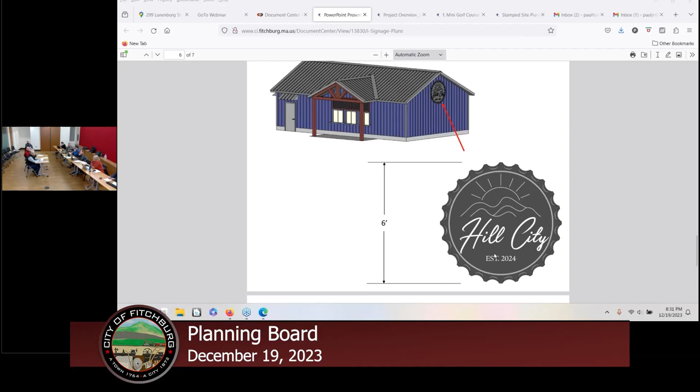And with the sign, I believe you uploaded pictures. So I did put pictures of the sign. And you're finalizing the vendor? Yep, right now. So I have pictures of what it looks like, using the existing marquee, and just gonna have that in the building. And then on the building is just a 6-foot one that will have our logo as well. I did tell him, I don't know if you agree, but I like that Hill City is...

It feels good. We put a lot of thought into what made sense. Hopefully it says established 2024. Hopefully they get the putt part so that they know what Hill City is. That's the nice thing about a term that's not coined, it's unique to the business, and I think it's appropriate for our city. I like it. Yeah, we're gonna know what it is, and that's it.

Does that website exist? I own the domain. Not yet, anything. I was just curious if you had a coming soon page or a picture. Leading up to meetings, I usually get calls, and I've talked to a few people, a Ward 2 councilor in particular, and said we had a light agenda, but this was one of the things on it. The comment I got from the few people I talked to was, oh, it's really different, really great idea. So I think you'll get some buzz once you start moving along with designing this. I do own the website, just haven't put anything on it.

Does the board have any? I know I asked a lot of questions, a lot of things. Is there anything else you'd like to talk about, or anything about the sign, you're using that existing structure? Yeah, the sign. I'm assuming you're gonna paint it.

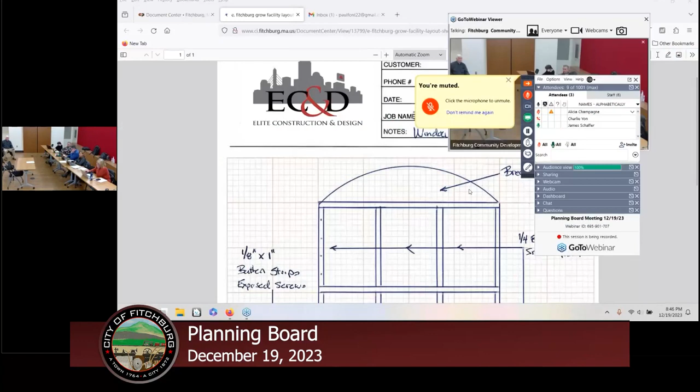So I see that we'll probably do the windows first. On the estimate that I provided, under the description, it says the materials to cover the windows will be vinyl siding. Because all I saw was the diagram, it still didn't tell me exactly what was being done. Then I saw the estimate and it's like, okay, so it's black vinyl siding.

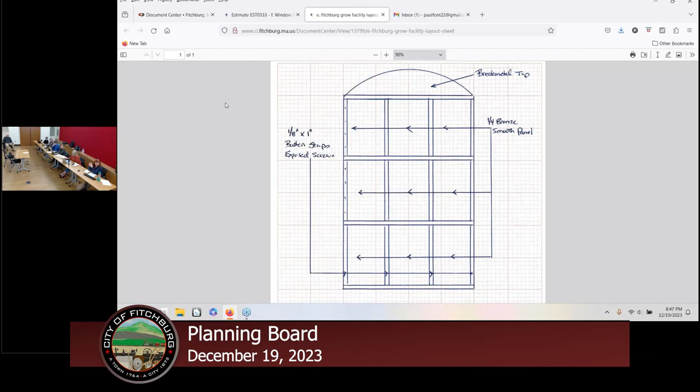Yes, and continuing, you're going to have a metal grid. Yes, that's basically the backing that the vinyl siding is going to be attached to, and it will look like the rest of the windows. So we say vinyl siding - it's just going to be one piece of siding, so it's flat.

Yes. And then there's going to be a window frame that is also going to be vinyl, that is going to look exactly like the first floor. So when you say vinyl siding, it's a piece of sheet vinyl that's flat. Yes, not like a side of a house with 4 or 6 inch slats - no, it will be flat. And then there's going to be another vinyl grid that goes over it that looks like the actual window frames.

A vinyl grid, so go back to that. But the brake metal top, let's see - so those are going to be like you'd have a J channel in vinyl siding. Those would be like a black channel that the sheet vinyl tucks into. It's going to be so hard to picture this, but I'd like to see an actual rendering of what it's supposed to look like.

My suggestion would be to have them install one that's easily visible that we can see before we approve all of them. Okay, I can do that. I think that's the best way to make sure, and just to be clear, we're still talking about just the courtyard, correct?

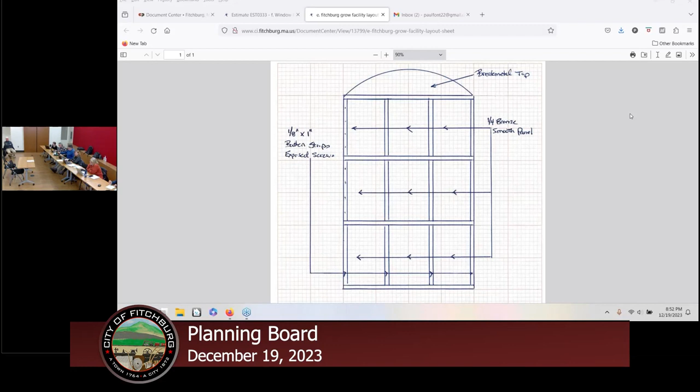How you doing? My name is Patrick Bozeman, and I'm the maintenance manager for Rev Clinics. We have a plan of action for the odor remediation.

We're going to start off by adding carbon air filters, 7 to each floor. That's the start of where we're starting off at, with that base. We're going to see where it goes from there and progress and add more. As a start right now, I have 7 I got cleared for to do each floor, so that'd be 27 carbon filters to bring down the smell inside the building and outside the building as well.

So I believe, sorry, were there no carbon filters previously? Yes, there was, and they got old, so we're replacing them. I just got approved to purchase 27 filters, so I'm waiting for those to come in, and I'll be reinstalling those inside of the facility.

So this is not new, this is just replacing what you have? Yes, ma'am, that'll help with the smell, because I believe the older ones need to be switched out to help with the smell a lot more. Question about where your O&M is, because that should have been done long ago then. They've been installed already, we're just adding more to try to help with the smell.

And just so we're clear, it's not a question of helping the smell, it's a question of getting rid of the smell. I talked to someone at the CCC, and they state that their permits all require you to abide by state law, which is no noxious odor outside the building. I think you guys are aware that I've been getting almost a complaint a day from the Ward 2 councilor. I drive past there every morning, and there almost isn't a day where the smell isn't overpowering, particularly when the air's heavy, like if it's raining.

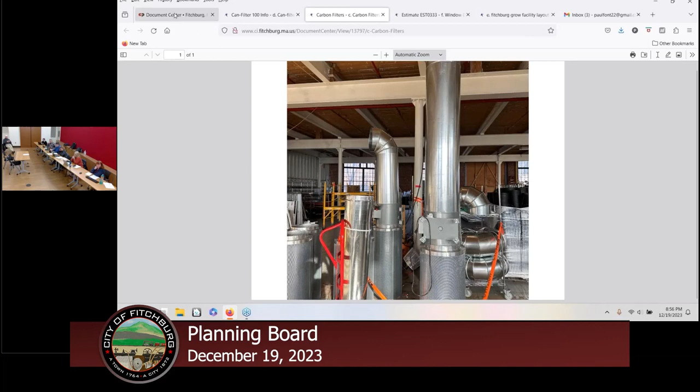Okay, are you replacing the old filters you said you had? Right, yes, we're changing out the old ones, and we're adding more just to try to bring the smell down a lot more. Adding new ones. Yes, ma'am.

In the blueprint you have, if you see those little red dots in the corridors, those are going to be the new filters that we're adding to the floors. These ones right here? Yes, sir, the can filter.

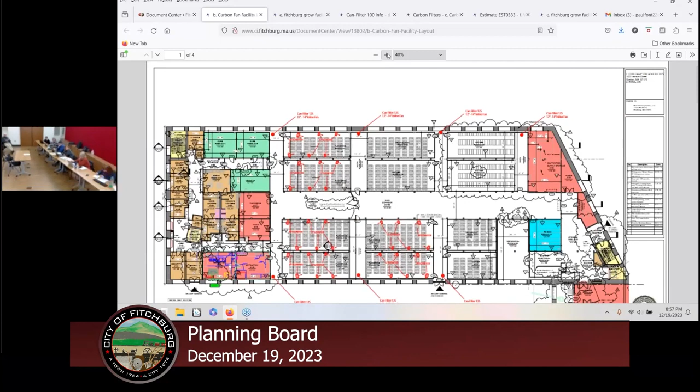Yep, they're in the hallways, a lot of the hallways. It's going to be seven for floor 1, and floor 3, and six on floor 2. Those 7 filters remove 15,000 to 15,400 CFMs of air per floor.

I believe each floor, floor 1, 2, and 3, has 8,000 CFMs that need to be added. So I figure the 15,000 will be a little overkill, but that should help the smell come down a lot more.

Again, it's not the smell coming out a lot more, it's removing the smell entirely. Yes, that's the standard CCC has, and that should be the standard we hold you to as well. It's in the permit that it's getting rid of the smell in its entirety.

I talked to the Ward 2 councilor today who wanted to remind me that he went by there at 11:40 this morning and the smell was still bad. We had a conversation about this, not this morning but earlier this week, about the timeline, and it was basically: this needs to be fixed.

I explained to him that it's going to take a while to get your equipment. I think the conversation I had with him, and the way this board needs to handle it, is if by June it's not solved, we're going to have to start thinking about more serious ramifications. Another aspect was the permitting for the outdoor facility—this odor needs to be dealt with first before that.

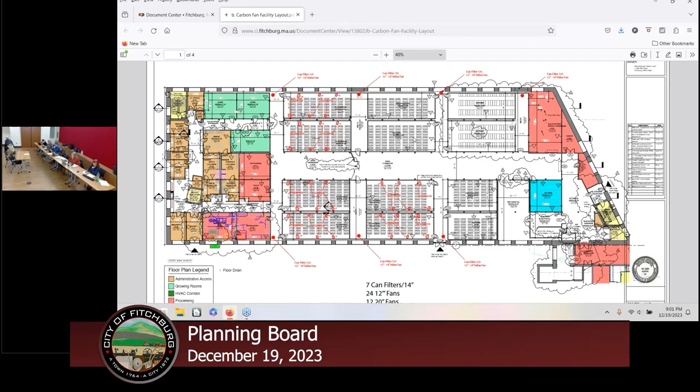So we could have you on the February agenda, potentially. Weather permitting, but yeah. Tentatively February.

I would just suggest that if it doesn't get done in January, which I certainly understand if weather's an issue with the window, fine, and it gets pushed off. Just coordinate with our principal planner, Chantel, about what time frame we're working with, so we can put you on an agenda in the future. Will do, thank you.

So we're glad you're working on addressing it, we just all want it done sooner. Oh yeah, no, that is completely understandable. I really do appreciate your patience. Thank you, guys. Does the board have any comments or questions? All set here. Okay, thank you.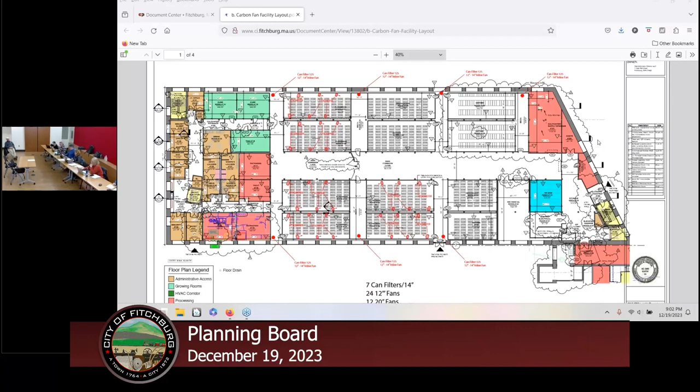And now we've got 140 Industrial Road LLC, review of cannabis odor mitigation plan. Yep, Charlie, I just unmuted you.

Good evening, thank you to the board for allowing us to appear this evening. This is Charlie Yon from 140 Industrial Road, and also on the line this evening is Alicia Champagne-Berge, our Senior Compliance Coordinator. At our last appearance regarding the special permit minor modification we requested to add medical licensure, a neighbor appeared and lodged a complaint regarding odor at our location. So we...

...followed up on the planning board's request to develop an odor mitigation proposal, which you're scrolling through now. So we're looking at, what, 3 months is what if I'm adding all these weeks together?

Yeah, so we went ahead with certain elements of the plan already. The activated carbon scrubbers have already been... Oh, hold on one second. Up here, wave your arms - no, those are timer lights, those lights went off. Sorry Charlie, go ahead. No worries.

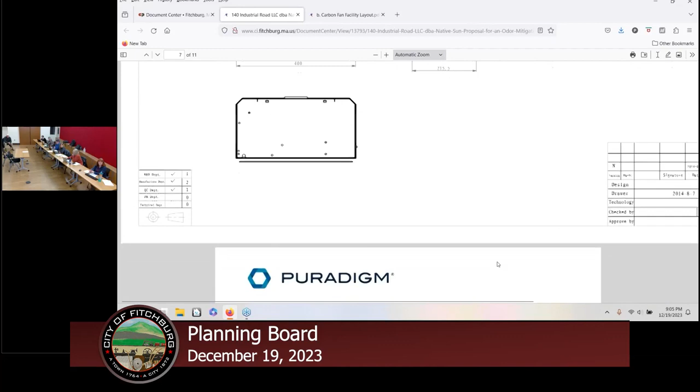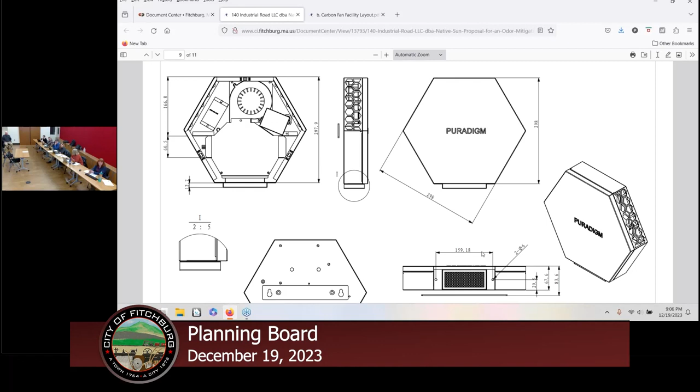I was at Monty Tech on Saturday. The smell was intense, and it was at noontime. I went to my niece's game, and I came out, and it was intense. That was Saturday around, it might have been around 1 o'clock. And that's near the school, so we really want to make sure we're not smelling that outside in that regard. I know it's like, the neighbor brought it up, but they're kind of the spokesman for the neighborhood to some degree, if somebody is at least mentioning it.

I'm glad that you're addressing it, we all are, because again there should be zero odor coming from them. And Charlie, I'm sure you heard the last conversation, and obviously you're a newer operation so you get a little more leeway than Wanoosnoc Road because that's been such a long problem. But I do want to reiterate, I talked to someone at the CCC, and they stated the standard is the state, it's written into the permit. I have it highlighted, I don't have it with me, but basically the standard is that there should be no noxious odors whatsoever from cultivation facilities. So it's not just us, but it's the state you're going to contend with if you keep having problems.

Understood, thank you. You are the only facility on Industrial Road.

So the timeline here, you added up the weeks. So why don't we do this - my suggestion would be to keep things uniform, make it June, and that way in June we can hear both Revolutionary Clinics and an update. Yeah, this is still Native Sun, Charlie? Correct. Fine, but yeah, right, I know, I was just looking for the name. Yeah, Native Sun. So in our June meeting we'll get an update, hopefully good news on both fronts, Wanoosnoc Road and 140 Industrial Road.

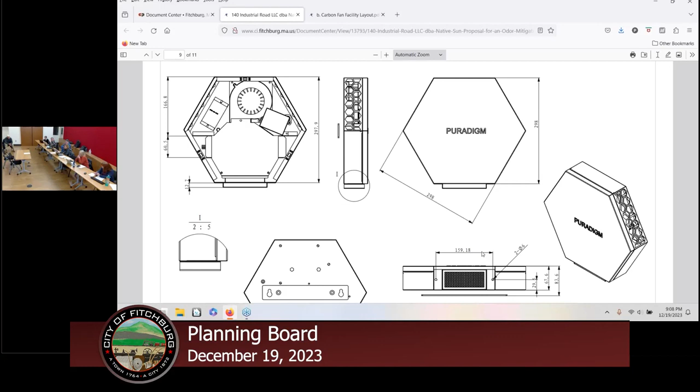Well, we also appreciate you taking a look into this and working on this as soon as it was brought up. Yes, of course, bonus points for starting work without waiting for things too. So good job, we appreciate that. It's always our intent to maintain good standing, not only with the municipalities we operate in, but our neighbors. So we will continue to work at this. You have our word. Great. Thank you, all right, thank you very much. Thank you to the board. Hope everyone has a safe night. Thank you. Okay.

Unless we have any further communications, Chantal? No? Our next meeting is going to be what? CDBG on January 11th, is that what I heard? Yeah, that's what I had in my calendar. Yep, and then our regular meeting is January 23rd. I think I posted the meeting deadlines document online in the documents. Right? Perfect.

That being said, we don't have any minutes. The community development office did hire a new administrative staff person, so hopefully we'll start to see some of those coming up in the new year, and get caught up.